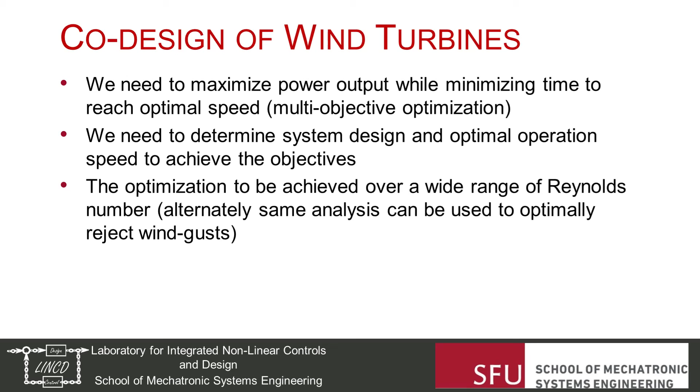Coming back, I would like to spend a few minutes talking about my secondary research area, which is co-design. One of the things we're working on is with a company to optimize the wind turbine design as well as the optimal operation point.

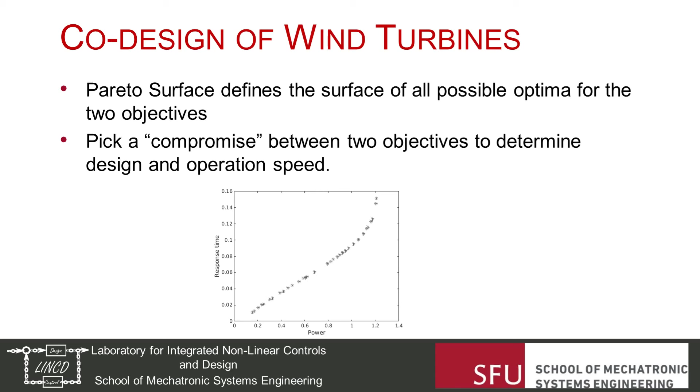So we did some simulations. Since we have conflicting objectives of minimizing the response time as well as maximizing the power, we use something known as a Pareto surface, which allows us to pick a compromise design. This is both the controller and the physical system optimization. We did CFD simulations using OpenFOAM.

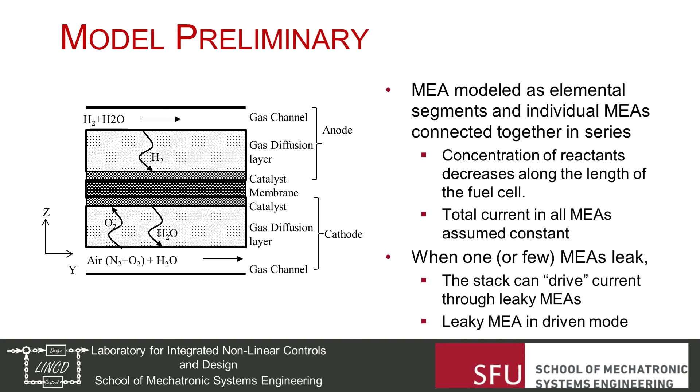The fuel cell might short, and there's an issue with hydrogen emission. So we developed a model which can capture both the dynamic transient behavior of the fuel cell as well as the emission when the leak initiates.

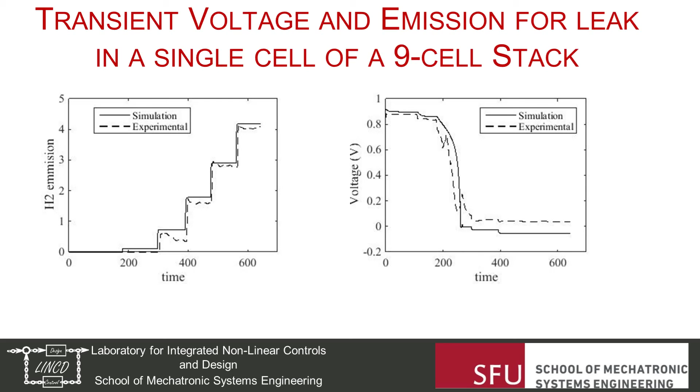What we're working on is actually controlling, including some of the observer methods, to diagnose the inception of leaks.

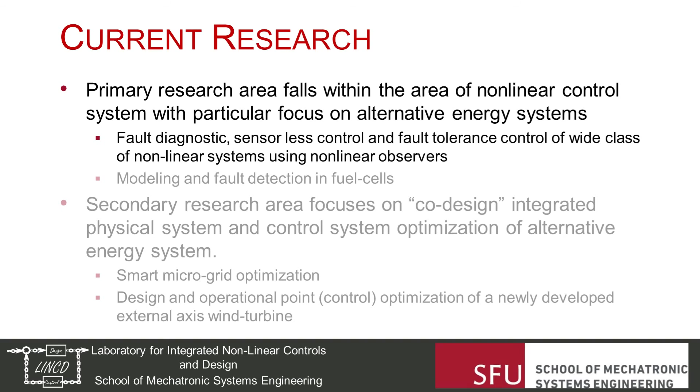This talk is going to be more on the primary area, nonlinear observers, and we'll see how we can do fault diagnostics, sensorless control, and fault tolerant control of a wide class of nonlinear systems. Before I proceed too much further, I would like to give a quick background on observers.

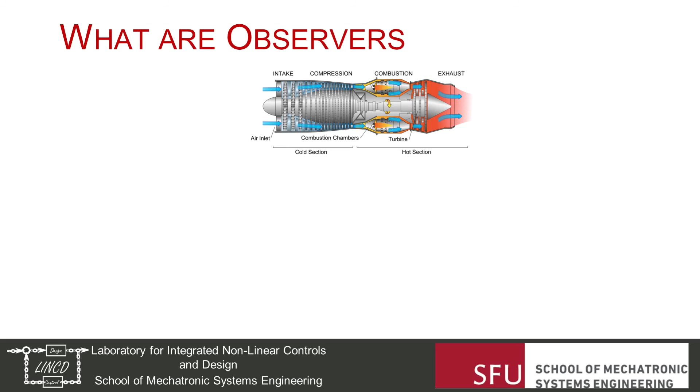We begin by considering a fairly complicated physical system. Anytime you have a system, you can decide on the different parameters as well as the different states, which are the internal variables of the system, and then write a dynamic equation in this form where U is going to be the input—in this case, it could be the fuel going into the engine—and then you're going to have output Y, which in this case would be the thrust produced by the engine.

The actual relation between the fuel going in and the thrust is a nonlinear relation, which depends on the internal states, for instance the RPM of the compressor. If this is part of an aircraft, it's also affected by the velocity of the aircraft, which affects the inlet condition, and that decides the actual thrust that comes out.

What you'd like to do is control the thrust to some particular set point by controlling the fuel. So you might have a control system which looks like this, with a reference. Either you measure the thrust and feed it back, or you might want to control the fuel consumption for some reason.

In which case you decide on a control system which takes the x's, the states of the system, and decides on the input that goes into the system. Unfortunately, not all of these states in the system are going to be known.

What you would do instead is construct something known as an observer, which tries to replicate the states of the system by considering the input U going into the actual physical model, as well as the output produced by the system. You have a model with an internal representation of the system, plus some measure of y, the actual output, minus h of x hat, which is the output of your observer, and based on that it tries to recreate the states.

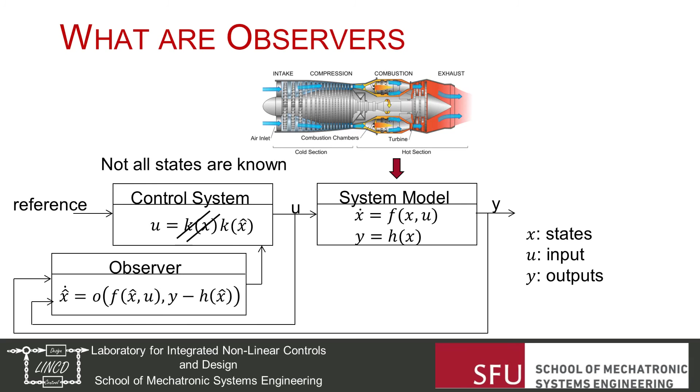Once you have this x hat, you replace your control signal. Instead of using it as k, some function of x, you do it as a function of x hat.

For this to work, you can ignore the controller part, because the controller is common between the system and the observer. Then you try to figure out what it takes for the whole system to work, and notice that for the observer to be of any use, we need the x hat, the estimates, to converge to x, the actual states of the system, irrespective of initial conditions.

So x of 0 and x hat of 0 are the initial conditions of your system. Irrespective of what those values are, when you start your observer, you want the observer values to converge to the actual states of the system. So this was the objective when dealing with observers.

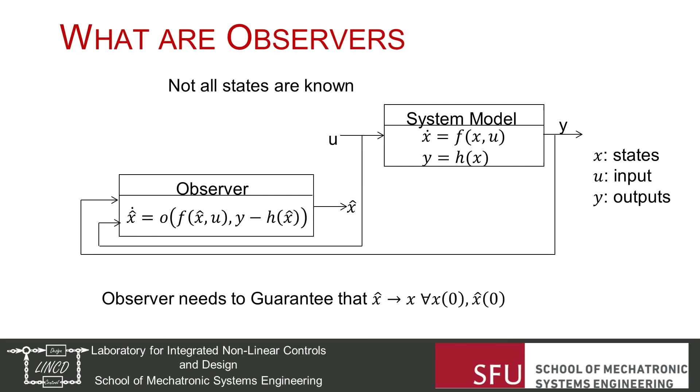You can think of an observer for a linear system as well. For a linear system, you have x dot equals Ax plus Bu, and the output y equals Cx. A, B, C are matrices of appropriate dimension.

Then, just using the model of the system, you can construct your observer as shown below: x hat dot equals A x hat plus Bu, which, if you notice, mirrors what the system is.

But now that you have the actual physical measurement from the system, you add an additional term, L times y minus C x hat, which is a measure of how much the observer's sensor value deviates from the actual sensor value. Based on that, you guide your observer towards the actual system value.

You can define the estimation error x tilde as x minus x hat, and saying x hat converges to x is the same as saying x tilde should converge to 0. We want to construct a dynamic equation for x tilde dot.

We can consider what it actually means and substitute for x dot and x hat dot, and when you cancel terms out, b times u being common cancels out. You end up with x tilde dot equals (A minus LC) times x tilde.

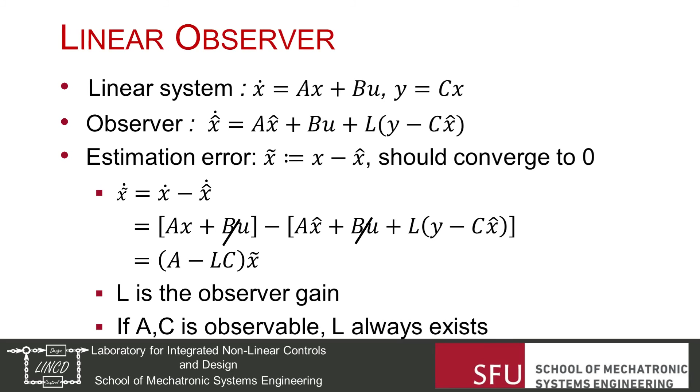Here L is the observer gain, and if (A, C), with A being the system matrix and C being the observation matrix, is observable, there is always an L that stabilizes it. Indeed, you can arbitrarily place the poles of A minus LC.

So if you consider a simple spring mass example, you can use the MATLAB pole placement tool, 'place', with A transpose, C transpose, P, and then take the transpose of the whole result to place the observer poles at an arbitrary location. The reason you use the transpose here is that pole placement is ideally designed for controller pole placement, but because the observer and the controller are analogs of each other, you can take the transpose of the observer and use it to place the poles of the observer system.

So if, for instance, you wanted to place the poles at -25 and -30, you can actually throw the whole thing into the pole placement tool, and then it gives you a gain of 50 and 490.

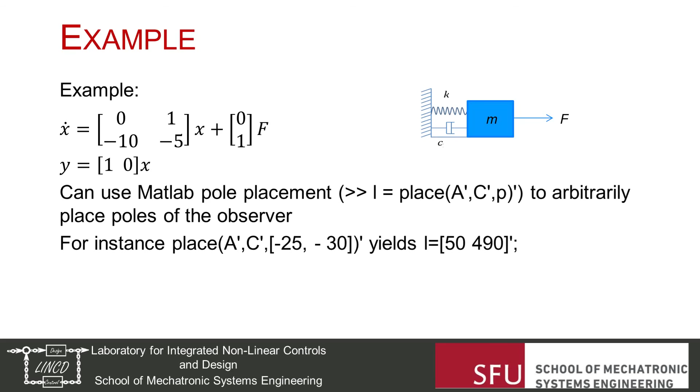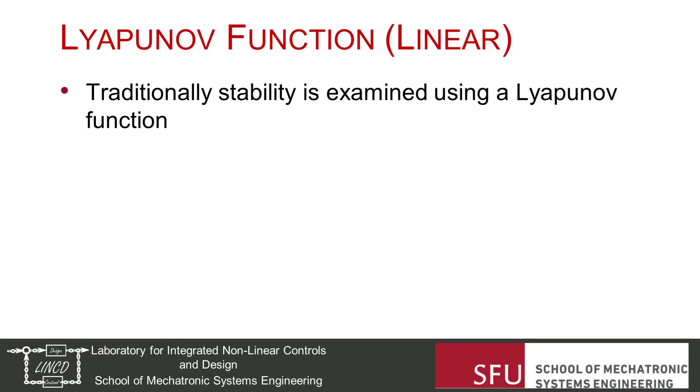Generally, when you want to look or study the stability of a system, we look at something known as the Lyapunov function. Traditionally, what we do is we choose a positive quadratic candidate function. The quadratic is more traditional because you can write it as an inner product and use a lot of matrix manipulation. So we start with V is x tilde transpose P x tilde.

We want to ensure that P is greater than 0. This ensures that V, the Lyapunov function, is positive for all values of x tilde. And then we would like to show or design an L which ensures V dot, which is x tilde transpose P x tilde dot plus its transpose, is less than 0 for all x tilde not equal to 0.

Now if you recall, x tilde dot is A minus LC times x tilde. If you plug that into the system, you basically get V dot is A minus LC P plus A minus LC transpose P, times x tilde. If A minus LC is Hurwitz, or has negative eigenvalues, you can always find a P which ensures that V dot is less than 0.

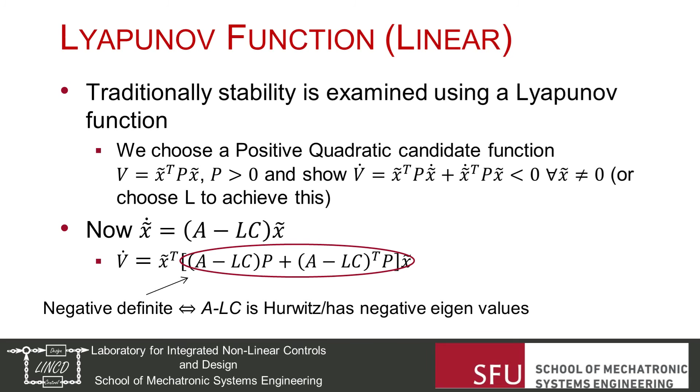Now we actually look at a nonlinear system wherein we're going to look at a specific class known as the additive nonlinear system. Here our f of x,u is going to be Ax that we saw before in the linear system, but then we have an additive nonlinearity in the form e times phi of u,x or x,u, and then we add plus bu, which is the actual input to the system, and y is the sensor measurement.

This kind of nonlinearity is fairly common in many physical systems, particularly in robotics, where gravity shows up as a sine term, and in a lot of other systems when you do feedback linearization it actually shows up in this form. So this structure of additive nonlinearity is fairly common in control systems, and so we're not actually restricting our observer design.

The observer is going to be x hat dot is A x hat. Essentially, we are again copying the system down, plus phi of u, x hat, plus bu, and then as before we add our linear feedback term.

The observer design process is fairly complicated, and you can't really do too much beyond adding a linear feedback term. You can potentially add a feedback term into the nonlinearity, but when you actually write up all the equations, we end up not having any additional degrees of freedom.

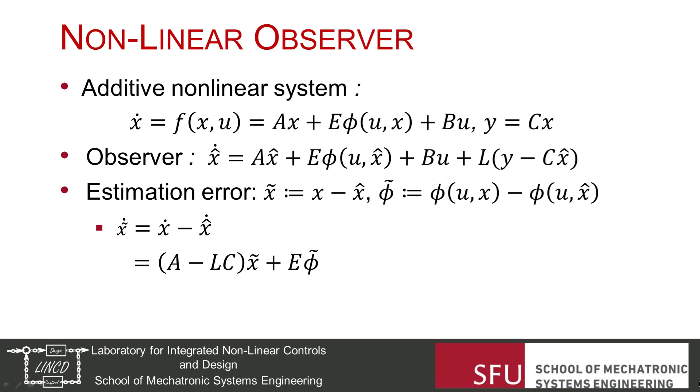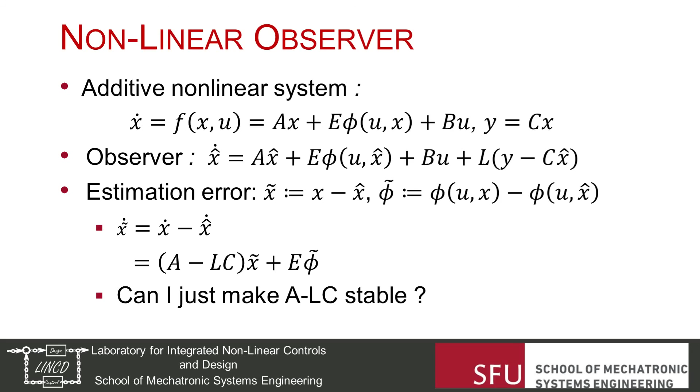Now the question is, can I make A minus LC stable and then ensure that x tilde actually converges to 0? This is obviously going to be a trick question, and we see that this is not actually possible.

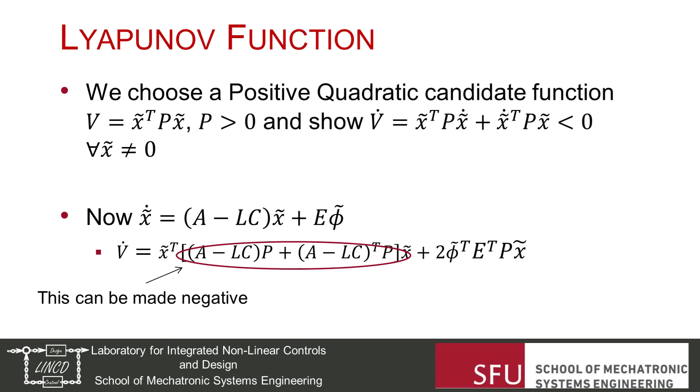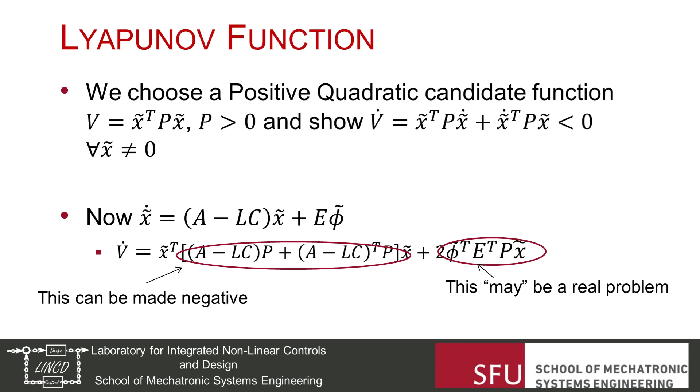Unfortunately, the term on the right side could potentially be a problem because the phi tilde can be all over the place, and you can't actually ensure that phi tilde E transpose P times x tilde is always negative. So to illustrate this, we'll look at a very simple example.

We are going to look at something known as a dissipative system, where your nonlinearity is always opposite to the x tilde term. So you can think of terms like viscous drag, which is a dissipative system.

Essentially, the nonlinearity removes energy from the system. I have made A minus LC to have eigenvalues at minus 0.5 and plus minus 2.3979i. So the linear part of my system and observer is actually stable. Now my nonlinearity, if you look at this, is actually negative. So physically, it looks like the system should be stable, right? You have a linear part which is stable, and you're throwing in a nonlinearity which removes energy from the system, so you'd think this should actually be stable. So what is happening here?

If you actually look at the Jacobian of the system, the derivative with respect to the states x1 tilde and x2 tilde, you'll notice that for x2 equal to 0 and x2 tilde greater than square root of 6, the eigenvalues of the Jacobian are actually positive, which is really bad from a stability point of view. I chose x2 equal to 0 and x2 tilde greater than square root of 6 just to make things easier. You'd notice that if you plug in different values of x2, you'd get a different set of x2 tilde, which would make the system unstable.

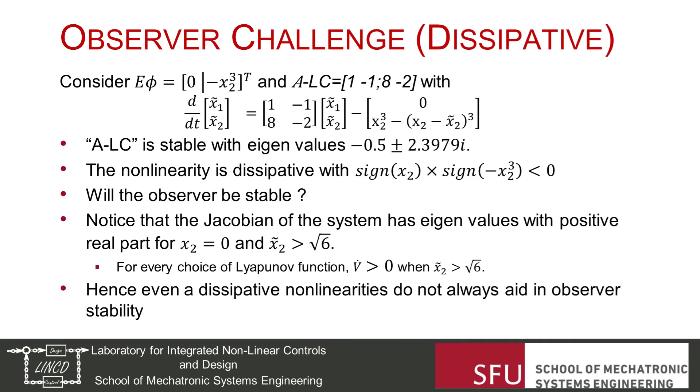So in addition to that, we are looking at other challenges. In the real world system, we're going to have sensor noise, which is an additive noise on the output. And then you could potentially have other disturbances acting on or affecting the system. Obviously, we don't have any knowledge of the actual values of the noise V and the disturbance W, so that doesn't go into the observer.

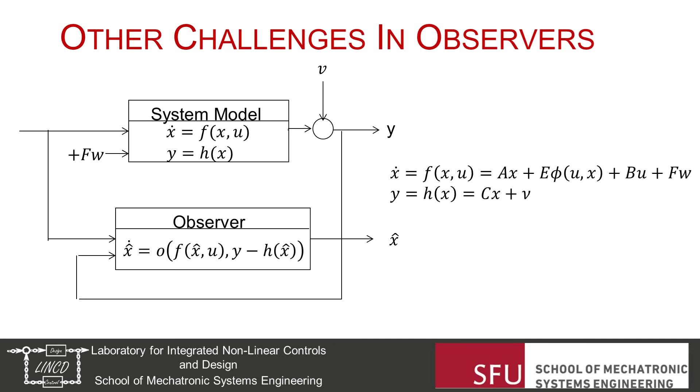So what we do is we have a nonlinear system which looks like this, again looking at the additive nonlinearity here. You have this term FW added here, and this noise nu added to the sensor value. So now we have additional things we want to consider when actually designing the observer. Essentially, how do I make sure that the system doesn't blow up or produce really bad results when you have these noises, sensor noise, and input disturbance?

Obviously this was a mouthful to describe, so let's look at a graphical representation of the nonlinearity. Imagine an arbitrary nonlinearity, with gx on the x-axis and the value of the nonlinearity on the y-axis. This basically means the whole nonlinearity lies within gamma 1 and gamma 2. Since we define it as the difference between any two points, we want to ensure any two points of the system are bounded between the slopes gamma 1 and gamma 2. So if I did a sweep, I want to ensure that the whole nonlinearity, all of the slopes everywhere, starting with any x and any x hat, remains bounded. Essentially every two points on the curve are bounded by a sector here.

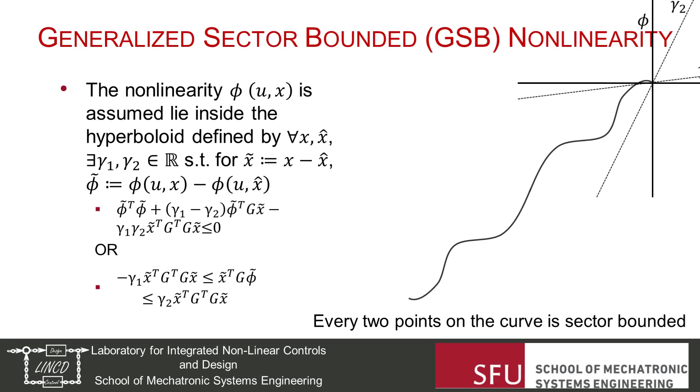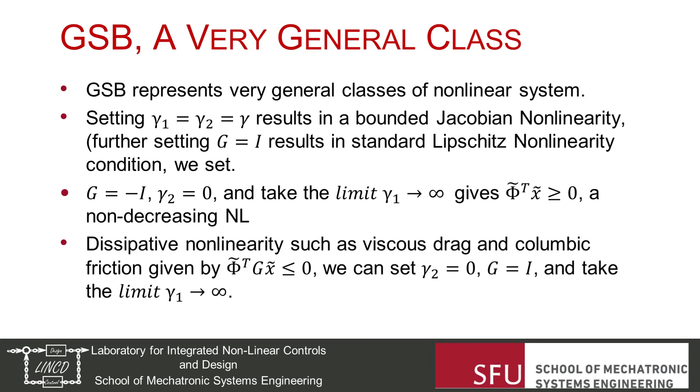To simulate a dissipative system, you can set phi tilde transpose g x tilde less than 0, for which we'd set gamma 2 to 0, then potentially set g to I, and take the limit as gamma 1 goes to infinity. So based on how we choose the nonlinearity, you can potentially choose different values of gamma 1, gamma 2, and g. This basically covers pretty much any general nonlinearity we can think of.

The first step is, if we have this generalized sector bounded nonlinearity, how do we design an observer in the absence of noise? This is the very first step. We say that we design this if we can find a P greater than 0, an epsilon 1 greater than 0, and an arbitrary X matrix of appropriate size such that the matrix M11, M12, M12 transpose minus epsilon 1 I is less than 0.

Where M11 is going to be my A transpose P plus PA minus XC minus C transpose X transpose plus epsilon 1 gamma 1 gamma 2 G transpose G, and my M12 is going to be PE minus epsilon 1 over 2 times gamma 1 minus gamma 2 G transpose. Once you calculate these values, plug this into the matrix here and find a P and an X which ensures that this matrix is less than 0.

Then what you can do is choose L equal to P inverse X, and our observer will be stable. The actual observer gain — because if you notice here, the unknowns P and X are linear terms — we can use what's known as LMI, linear matrix inequality solvers, in MATLAB or similar software, and very quickly solve the observer design problem and calculate the value of the observer gain which will stabilize the system.

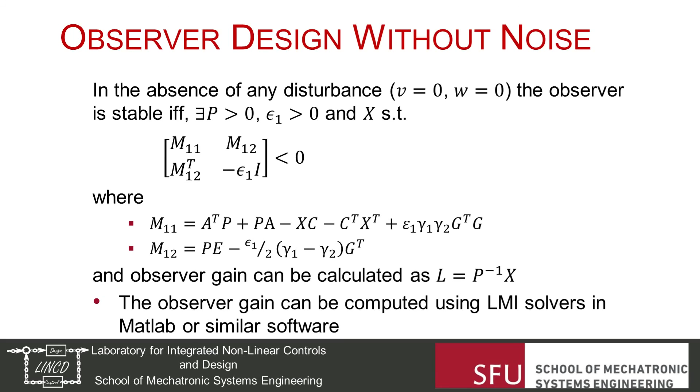Since this is an IEEE talk, I wanted to give a sketch of the proof. So we choose, or start with, the quadratic Lyapunov candidate function. V is x tilde transpose P x tilde. We try to take the derivative, because my x tilde dot is A minus LC x tilde plus E phi tilde.

We plug this in, and this is the equation we get. We have x tilde transpose x, and then you have this matrix over here, and then you have the effect of the nonlinearity showing up here.

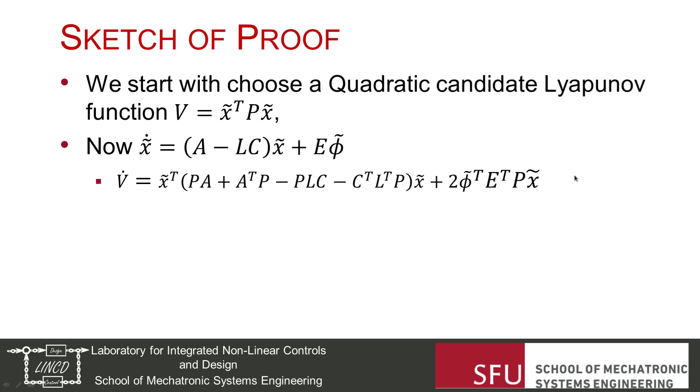We replace PL with X because P is — if your system state is of size n, P is going to be an arbitrary n by n matrix, and L is going to be n by ny, where ny is the number of sensors. So X is actually an arbitrary full matrix. Anytime you can solve for the value of X, if you multiply X by P inverse, you can get the value of L. So this substitution is actually good.

What this substitution allows us to do is convert our nonlinear function. If you look at this here, you're multiplying P and L, which doesn't really agree with LMI solvers. We're basically replacing the whole thing with a linear unknown.

Then we use a lemma, which is really nice, called the S-procedure lemma, which basically states that an arbitrary function v1 is less than 0 if and only if — this is important — there exists a negative semi-definite function v2, basically v2 less than or equal to 0, and an epsilon greater than 0, such that v1 minus epsilon times v2 is less than 0.

So here's the thing: we have a positive definite function here, and a negative definite function here which we're trying to show is negative definite. We're basically saying that, okay, I want to find a small epsilon such that if I remove this — so if I do v1 minus epsilon times v2, notice that since v2 is negative, this is a small positive term that you're adding here.

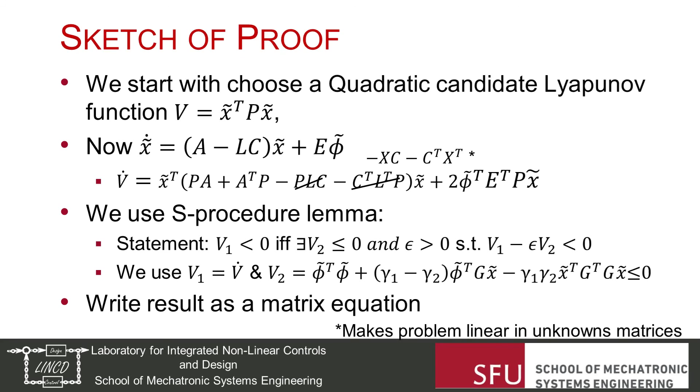So let's look at the case where we actually have noise in the system. Notice that you can't actually use Lyapunov stability in this case, because if I start with a quadratic Lyapunov over here, if I do the v dot, I end up with this term over here, which is 2 x tilde transpose p times f w plus l nu. Even if you have a bound, so if say w and nu are Gaussian noises, you can potentially have these to be completely unbounded, so you can't ever ensure that v dot is always less than 0.

That basically means that you can't actually show or establish Lyapunov stability, or establish stability from a Lyapunov sense. Instead, what we do is we define or try to create an H infinity observer.

So the H infinity observer is slightly different. What we do is, rather than try to show that the system is stable, we try to show that the system can be designed to achieve some kind of a minimized cost function, or satisfy a minimized cost.

So the cost itself is going to be a ratio of two terms. The numerator is going to be some norm of my error, or estimation error, and then you basically divide that by the norm of the disturbance and a norm of the noise. So you kind of have a weighting function here. So W would be arbitrarily decided based on what your application is. So if you're really interested only in states 1 and 2, you can basically have the W

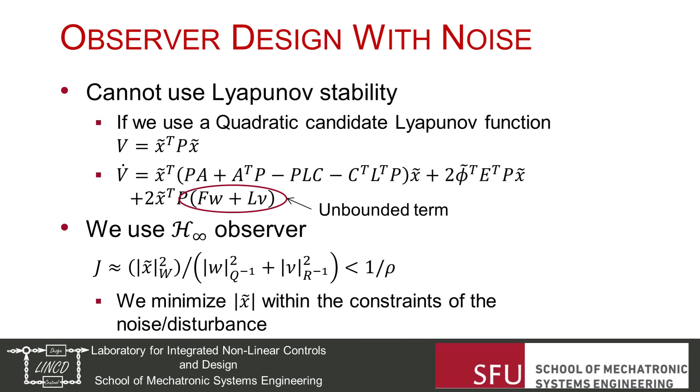So for instance, if I'm basically going for an exam, I've only been taught like 50% of the course. So what I'm basically trying to do is I'm trying to optimize my score based on the knowledge that I have, with a limitation of the external noise, and then I'm trying to minimize or design the best observer given that I have a limitation of the noise, or knowing the effect of the noise. So to put it formally, we're basically saying that we would guarantee H infinity performance given by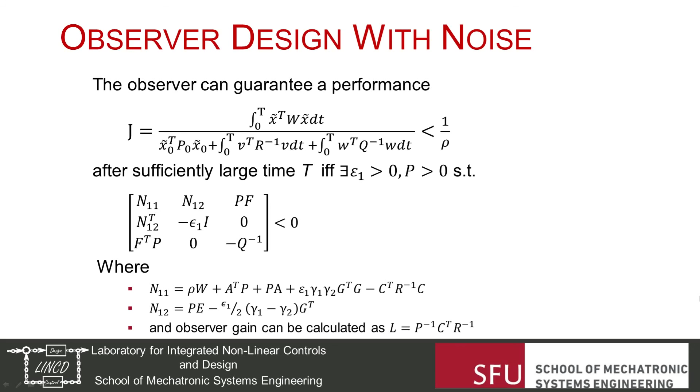So again, if we wanted to give the sketch of the proof, what we do is rewrite the cost function as a linear term rather than a ratio, and then we define an augmented cost function using the state equation constraint over here—basically J1 and then an integral with this Lagrange multiplier—and we again use the S-procedure lemma and then define the augmented function J bar, which is the augmented function minus epsilon times v2, and then we minimize J bar and write this result as a matrix equation.

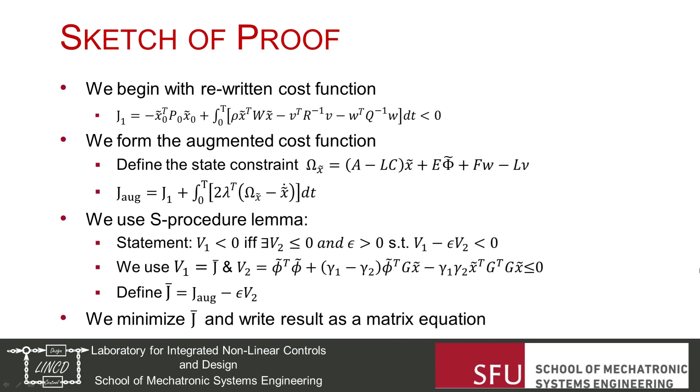A lot of math. So we're going to look at a few illustrative examples here. We look at a simplified version of a chaotic nonlinear circuit. So we look at the circuit here—it basically has a diode on one side and a resistor.

If the current is positive, you have the parallel resistance over here less the nonlinear term due to the diode, and if the current is going negative, the current only flows through RD here, RD2. So the whole thing represents a nonlinear resistance.

The output is going to be the charge on C1. If I define my states as Q1, the charge in capacitor 1, Q2, the charge in 2, and the current, we can write the state space equation as follows. Then for representative values of C1, L, RD1, RD2, and the diode parameters—V0 is 26 millivolts—we can simulate the observer for this particular system.

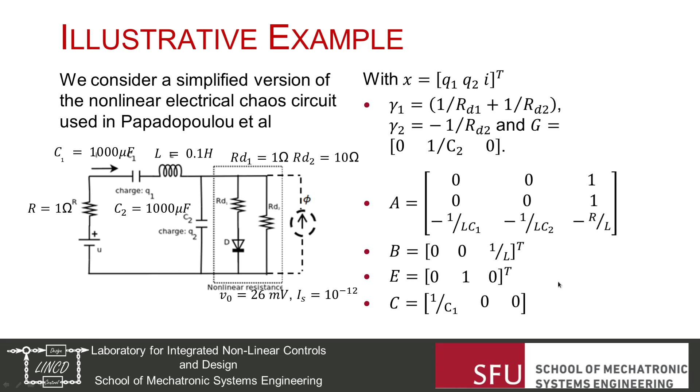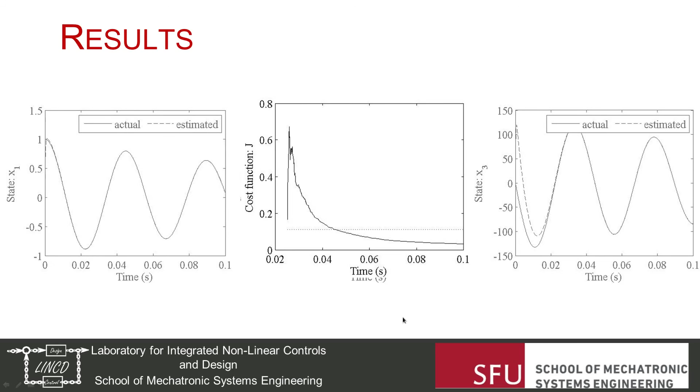We need to choose some arbitrary values of the noise here. Notice that we start our x-hats at 0, and we quickly converge to the actual states. So we look at the cost function J, where we wanted to achieve J less than 0.1, and we're actually able to achieve that.

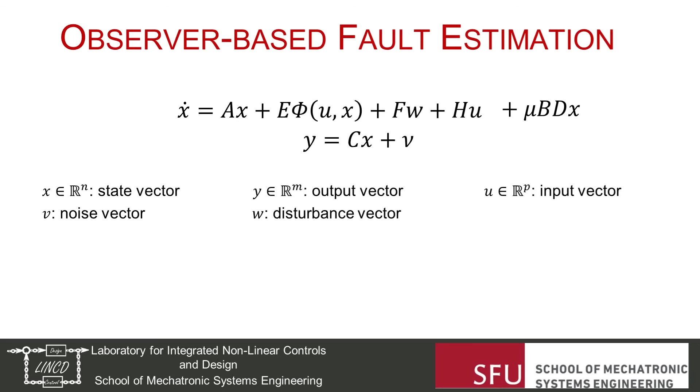Next, we actually look at extending the observer design method to observer-based fault detection. Again, we have the same system equation, and what we do is add either mu, which is an unknown term, or b dx, which is kind of the parameter, and based on the variation, which would be an additive parameter—or we can have multiple unknown parameters.

Essentially what happens is, this represents a system where you're not 100% sure about the mass or 100% sure about the dissipativeness. So in this case, you can actually write the whole thing in this form, where your uncertainty in the parameter shows up as mu, and how the uncertainty affects your state equation shows up in this b times d term.

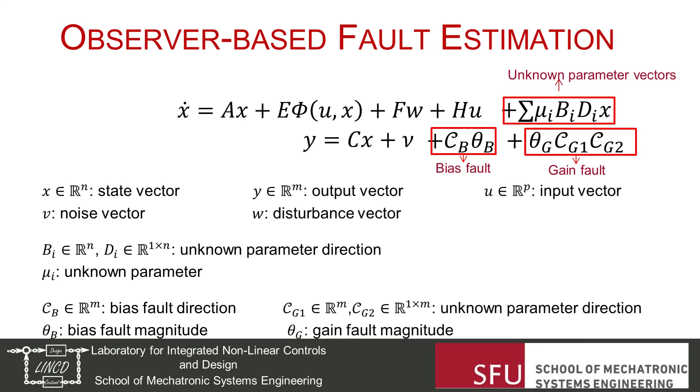You can similarly have additional bias and gain faults on the sensors, so we extend this to make an adaptive observer which can estimate all of these parameters. Again in this case, to illustrate, you have an uncertainty in mass 2, which shows up as follows.

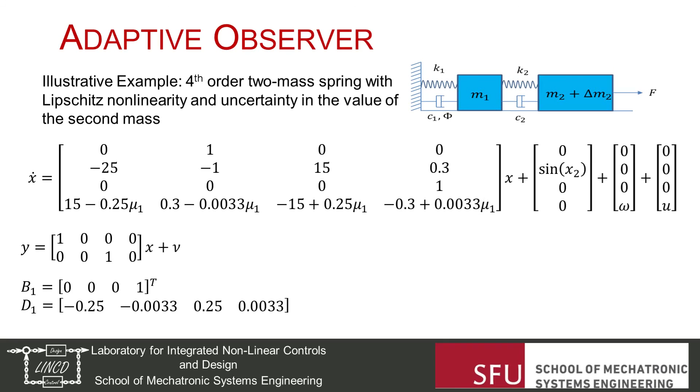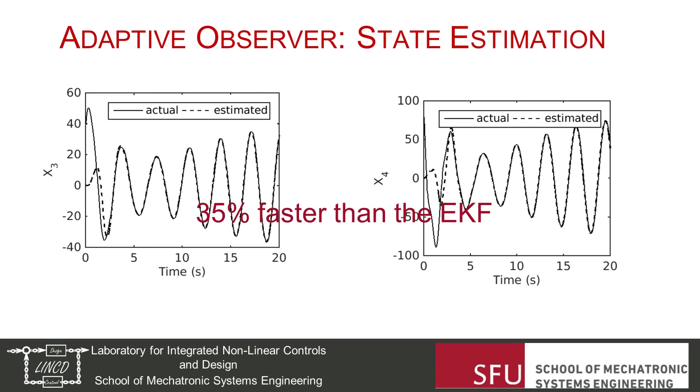We notice that the actual and estimated parameters, and both the states, converge, and we notice that the simulation is 35% faster than an extended Kalman filter. We'll talk really quickly about what the extended Kalman filter is in a couple of slides. We also notice that the adaptive parameter estimation also converges.

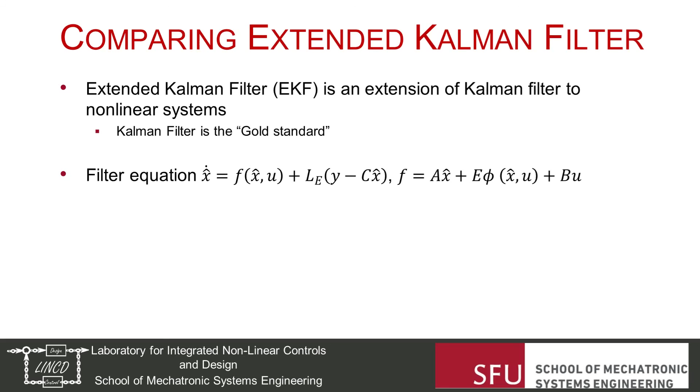So we're going to compare the system to the extended Kalman filter. The extended Kalman filter, EKF, is an extension of the Kalman filter to nonlinear systems. The Kalman filter is essentially the gold standard when you want to optimally reject noise and make an optimal estimation of the system. The filter equation we write in terms of F and L, and the gain is given as follows.

We basically write PE dot as F PE plus PE F transpose, plus a quadratic term, plus Q, and F is going to be the Jacobian, which is the derivative of F at the state estimates, and we can write this as follows. Then my LE, which is a gain that goes into the estimation, is calculated from PE. So essentially you start with PE at time equal to 0, and solve this Riccati equation as time progresses, and you can estimate L as time progresses.

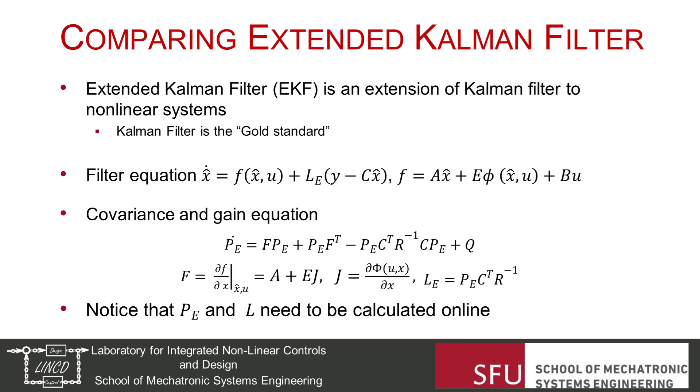This depends on the value of F. So PE and L need to be computed online, which adds to the computation cost of the Kalman filter. That's what gave us a faster response compared to the EKF.

We wanted to do a more extensive comparison, so we wanted to put both the EKF as well as the equations we had before for the H infinity Riccati equations on the same basis, and then compare it for a Lipschitz nonlinear system.

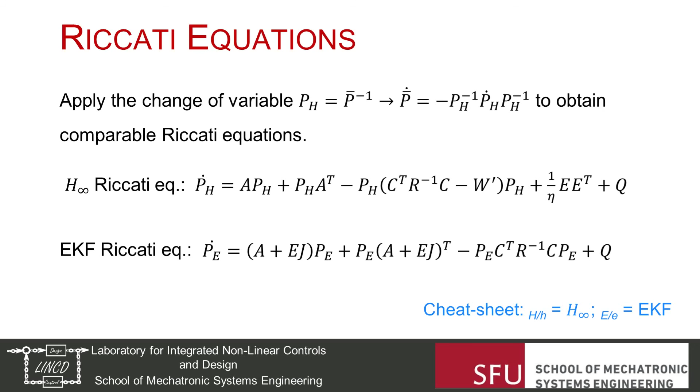So just a quick cheat sheet. Any subscript which has either capital H or small h corresponds to the H infinity observer for the sector bounded case, and E or little e subscript denotes the EKF values.

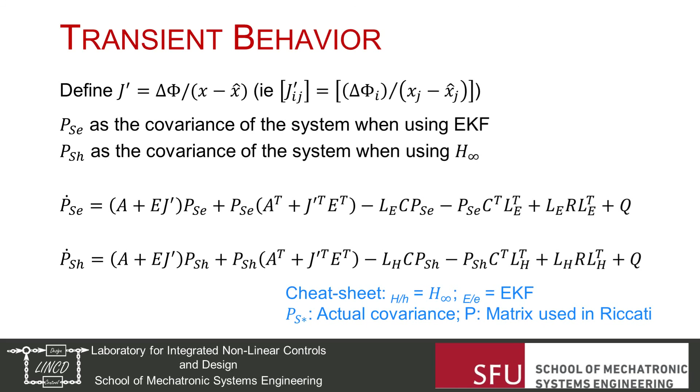So if we define the covariance, the actual covariance rather than the Riccati equation matrices, we have the two systems, the extended Kalman filter and the H infinity filter, going as follows. Anytime you have a subscript S star, it denotes the actual covariance, and then the P is the matrix

that's used to solve the Riccati equation. So we notice that in the EKF transients, if A plus EJ minus LEC is Hurwitz, then the covariance P sub SE converges to the filter covariance, or put alternately, P sub SE converges to PE if and only if J equals J prime. For the H infinity transient behavior, P sub SH remains bounded by PH from the solution of the Riccati equation. So the conclusion is that the EKF requires A plus EJ minus LE C to remain Hurwitz, which may not always be possible based on how the nonlinearity evolves.

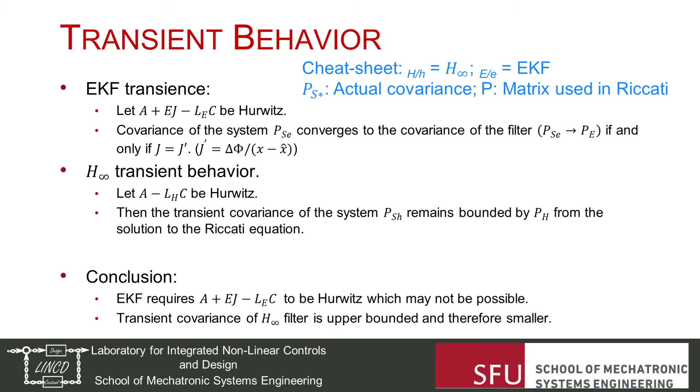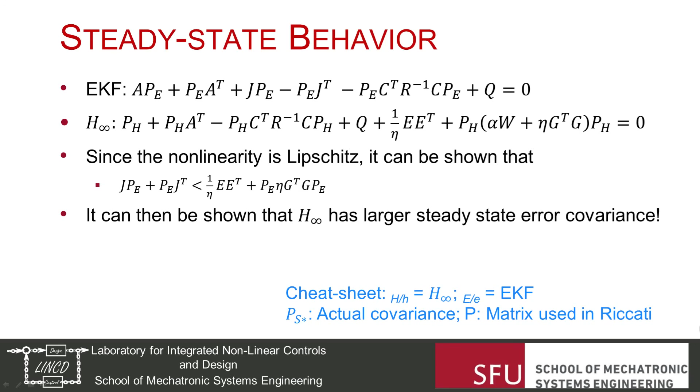If you compare the steady state behavior, because in the H infinity filter we look at the upper bound of the nonlinearity, JPE plus PE J transpose is always going to be less than this term over here. That means the H infinity filter is going to have a larger steady state error.

If you look at it really closely, this appears really strange. The EKF technically is an optimal observer, right? So you'd expect that the EKF would always perform better than the H infinity observer that we have proposed. But what actually happens is that the H infinity observer is globally stable, so it can guarantee the performance all over for all values of X.

So in particular, if my X and X hat are really far away when you start off, my H infinity observer potentially gives a better performance compared to the EKF, because in the EKF, the value of phi doesn't actually match the value that's used by the EKF, so this gives a larger error.

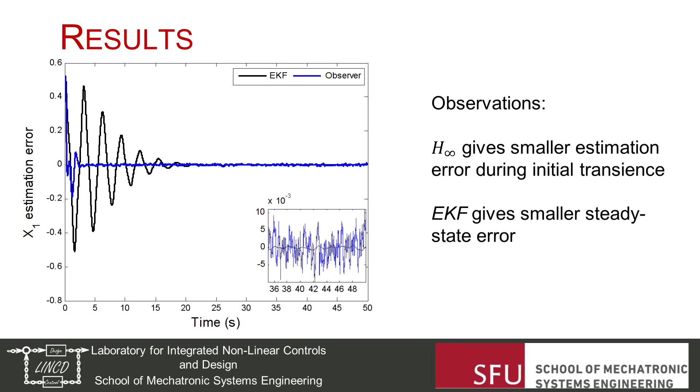The advantages compared to the EKF and potentially the unscented Kalman filter is that the stability and performance is guaranteed globally. H infinity does not demand online covariance solution, since the Riccati equation is time invariant and it could actually be computed offline. This makes it very efficient for embedded systems.

H infinity actually provides faster convergence of the error. This is particularly true when your initial estimates are further away, and H infinity tolerates a much wider class of noises, and the LMI formulation for the H infinity provides a convenient solution.

The main disadvantage of using the generalized sector bounded approach with H infinity is that the EKF could potentially provide more accurate results at steady state, particularly if the noise statistics is known.